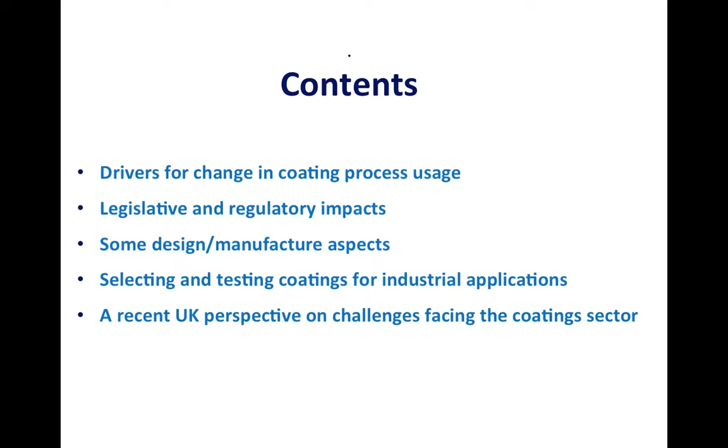Surface coating developments are being driven by technological breakthroughs and also by increased demands being placed on coatings. The increased demands may be based on legislation and regulation, such as environmental and health and safety, or by performance requirements such as needs to reduce friction and wear. So we've got technological pushes bringing along new developments. As we know, there are many new developments coming along in PVD, plasma-assisted PVD, but also by that pull from the regulation, the legislation, and by the performance pull.

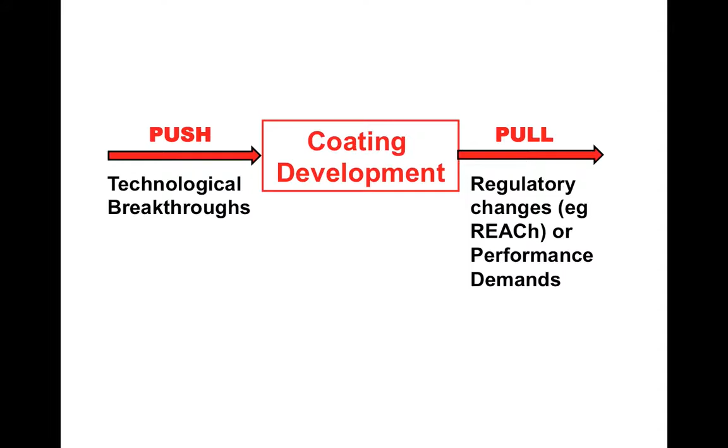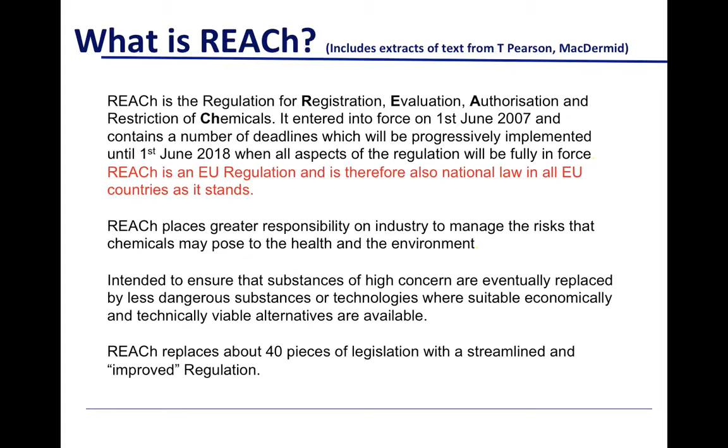One of the regulatory demands that's come along, which has been referred to a few times at this conference, is the so-called REACH legislation. What is REACH? It's an acronym, stands for Regulation for Registration, Evaluation, Authorization, and Restriction of Chemicals. It actually entered into force in the European Union in 2007, and contains a number of deadlines which will be progressively implemented until June 2018. This becomes European law in all the member states. It places a greater responsibility on industry to manage the risks that chemicals may pose to health and to the environment. It's intended to ensure that substances of high concern are eventually replaced by less dangerous substances or technologies where suitable economically and technically viable alternatives are available. So it replaces about 40 other pieces of legislation.

Originally, legislation in this area only covered new chemicals, but now this legislation covers all chemicals. There were about 100,000 chemicals which weren't considered for this legislation, but now they're all in there. In fact, there are something like 30,000 chemicals of immediate concern based on the tonnage quantities of usage, because REACH only covers certain weights and volumes of usage. It's a big deal if you're in Europe.

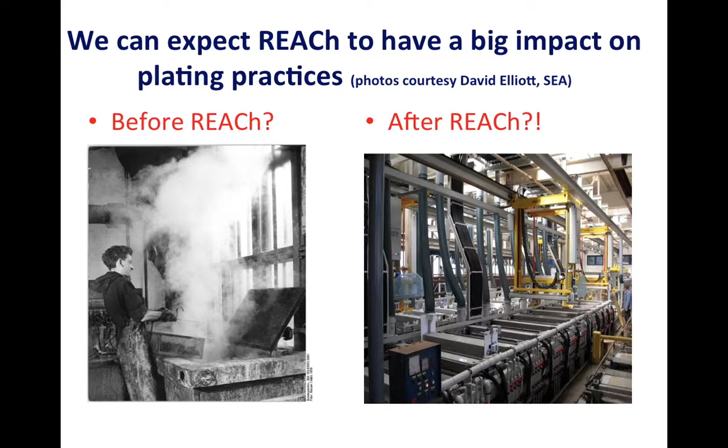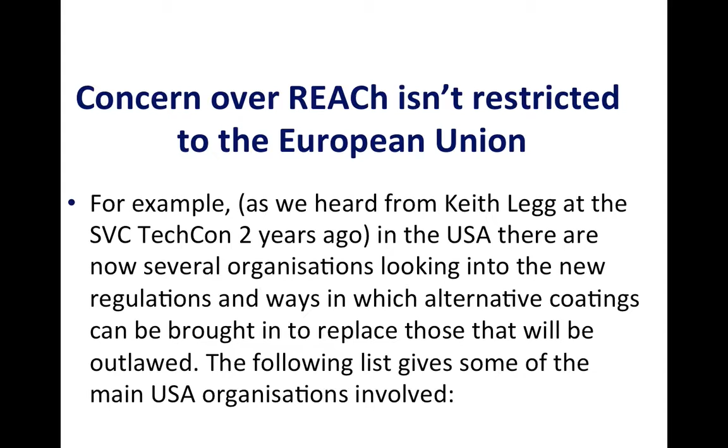If you're selling stuff into Europe, you can imagine that this legislation will start to impinge on all countries eventually. One of the main important groups in the States is ASETSDefense, and they're particularly interested in replacing these chemicals in the defense sector. They're looking for alternatives to hard chrome, cadmium plate, high VOC paints, chromates, etc. They also offer an online information source for DoD organizations and contractors.

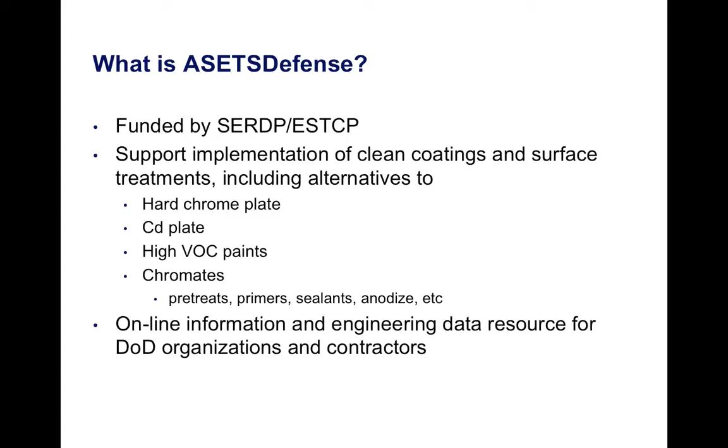We saw from Keith the way this is having an effect already on the F-35: implementing new non-chromate primers, testing Alumiplate to replace nickel cadmium on electrical connectors, new bushing materials, new aqueous electroplates, nanocrystalline cobalt phosphorus to replace hard chrome, implementing high HVOF tungsten carbide cobalt chrome as an alternative to hard chrome, and other changes coming along already.

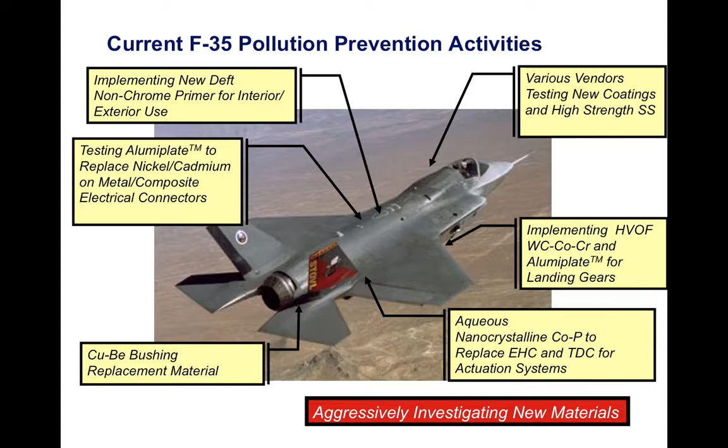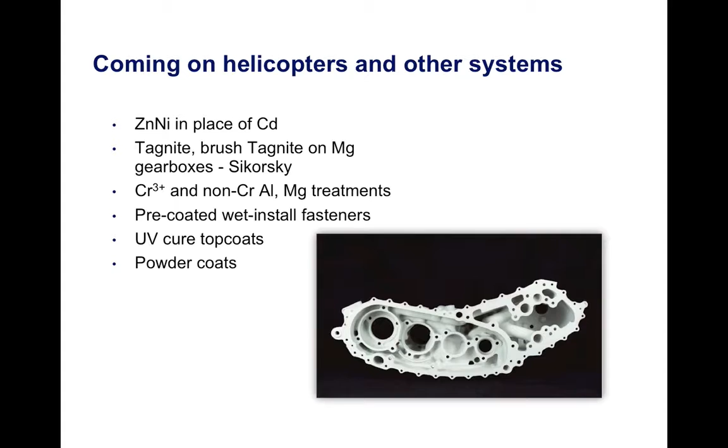On helicopter systems, people are looking at zinc nickel as a replacement for cadmium, various plasma electrolytic processes for magnesium gearboxes, and other things. You can see this is a real driver, it's affecting things already. These legislative and environmental changes are driving the use and selection of coatings and the development of new ones, carried out within constraints imposed by regulatory pressures such as environmental and health and safety concerns.

But it's also driven by performance demands - for example, energy concerns, sustainability, and efficiency demands that are coming along.

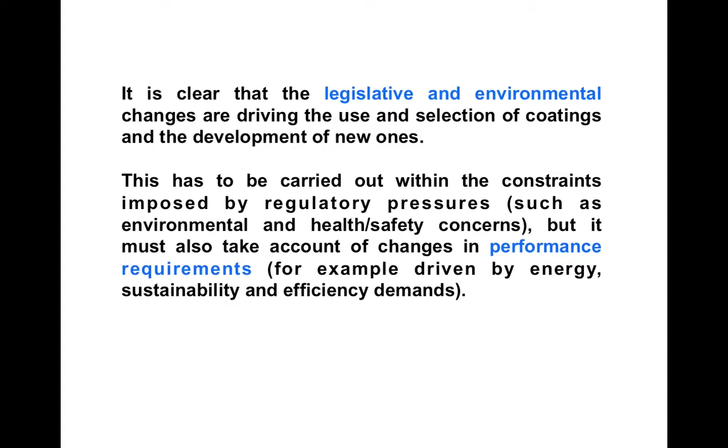The big problem, as I see it, if you're an end user of coatings and want to choose what coating to use as an alternative: there are a lot of application requirements you have, and a lot of possible solutions - a lot of coatings out there which you could maybe use. It's a major challenge how people select, test, and validate new coatings. That's the first demand for tribological coatings that I see.

We've tried to develop a structured way to make that selection - listing what's needed, then what is possible, then trying to progressively eliminate coatings for good reason. The wrong approach is to choose a coating, see if it works, and if it works, use it. That's not the best way. The best way is to assume all coatings work and then eliminate them for good reason, so you don't eliminate better solutions by default - because there's always a danger that if a coating happens to work, you assume it's the best, but it isn't necessarily. You have to go through this procedure, and it's very challenging.

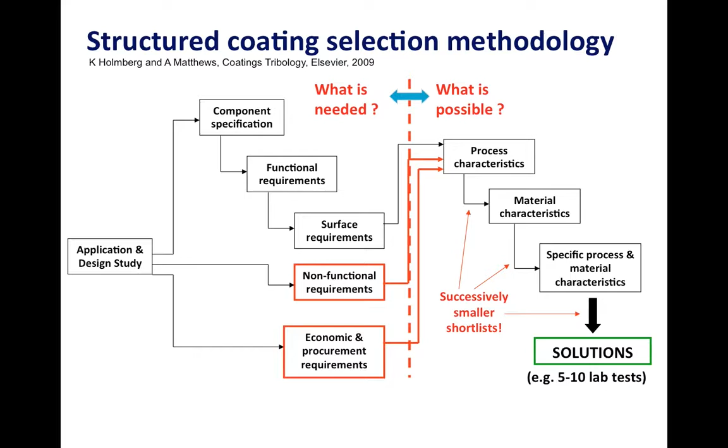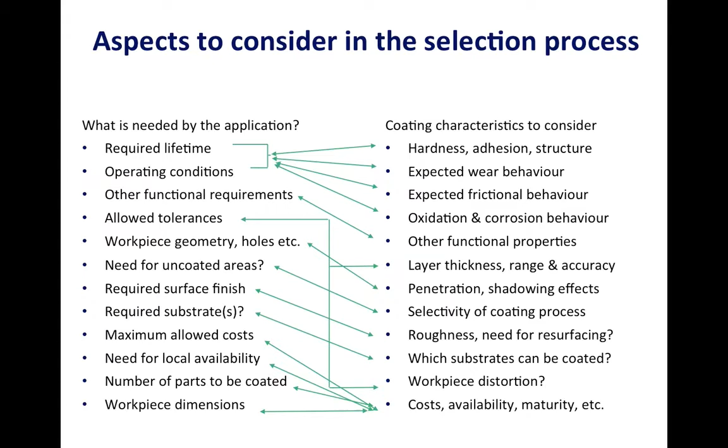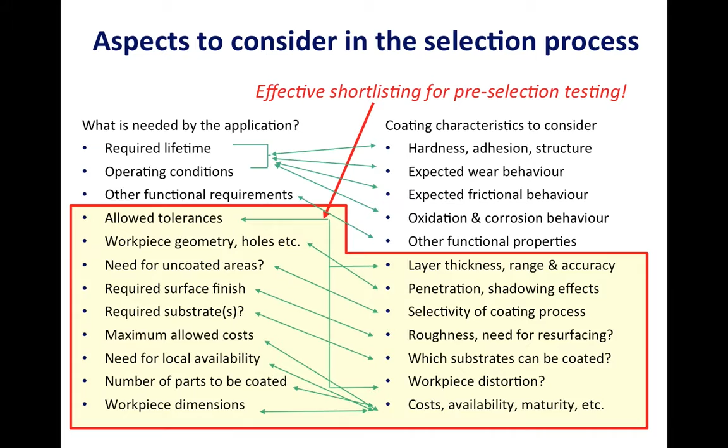If you think about the numbers of requirements for an application, and all the properties that can be influenced by a coating, you can imagine it's extremely complex to make all these interlinks and interactions to choose a coating that meets the application needs. You can get some way by eliminating ones that don't fulfill the basic process requirements - tolerances, geometries, masked areas, that kind of stuff. So you can make an initial elimination, but you've still got to find the coating that fulfills the performance needs.

The things that influence the tribological response are very much related to deformation of the system. What's the load on the system? What are the stresses on the material? What's the resultant elastic and plastic deformation? What's the fracture situation, and therefore what's the wear mode?

You've got to go through this for the different kinds of tribological types. What people used to do is just look at the wear mechanism and say, well, this application is abrasion, so we'll choose a coating to eliminate that abrasion. But I feel the thing to do is look at the contact type, because different wear mechanisms can occur in all the contact types.

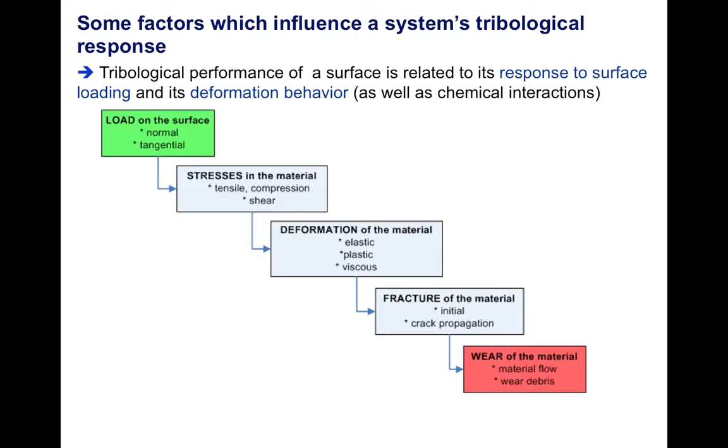So what I mean by that is there are several types of contacts. You could have sliding, you could have impact, you could have abrasion, and you could have fatigue-type mechanisms like fretting or just straight surface contact fatigue.

What I've done here is try to identify the requirements of these different contact types. The first thing to note is it isn't just hardness. Some people believe all you need is a harder and harder surface and that eliminates wear. That just ain't true by a long stretch of the imagination.

In fact, one thing we often emphasize is the ratio between the hardness and the elastic modulus. If you follow the stuff we write, we often talk about this because it defines something called the elastic strain to yield. If you have a high ratio of hardness to modulus, it means you can stretch the coating a lot before it yields. And that's more important than hardness, believe me.

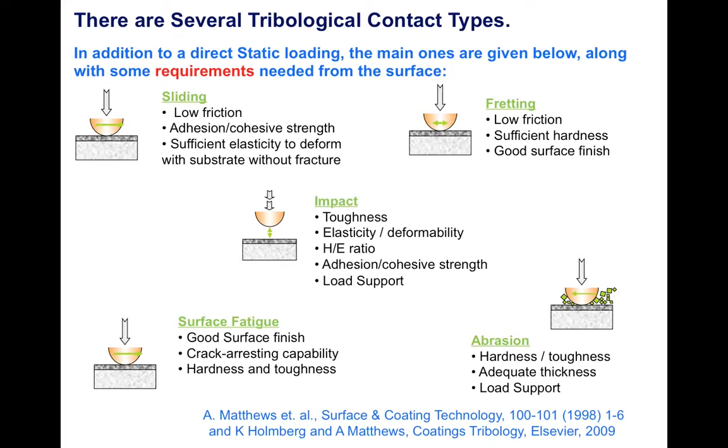Another thing we talk about is load support — the support that the underlying substrate gives to the coating. Again, people talk about load support but don't define what they mean. We all realize load support is important, but what do we really mean? Well, a lack of load support can make things fail in different ways.

If you don't have adequate load support, the coating could fracture, the coating could debond, the substrate could elastically deform—taking the component out of tolerance—or the substrate could plastically deform, taking it out of tolerance permanently. The substrate could fracture, or you could get plowing friction due to increased deformation.

So load support's important. That's one thing I believe is important as you develop new coatings: to consider the underlying substrate and the coating as a system, not just a coating.

You'd be surprised how many papers we get to my journal saying, 'I've done a hard coating on titanium to improve its wear resistance.' No, you haven't. Then they do a test at a few grams to prove the coating can survive, but there's no way it would work under a real tribological load. So you do need to have the load support.

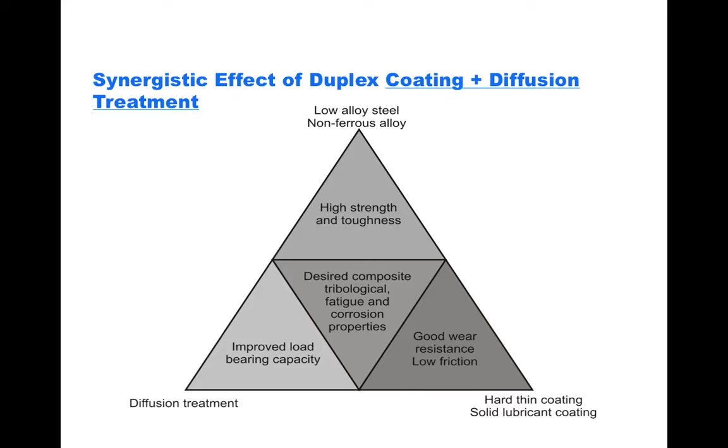One way to represent this is to have a diffusion treatment, say, to improve the load support, plus maybe a thin film to give improved tribology and wear resistance, or a solid lubricant film, together with a suitable substrate to combine them. That's what we mean by a duplex treatment. We think there's a big move towards duplex coatings and diffusion treatments.

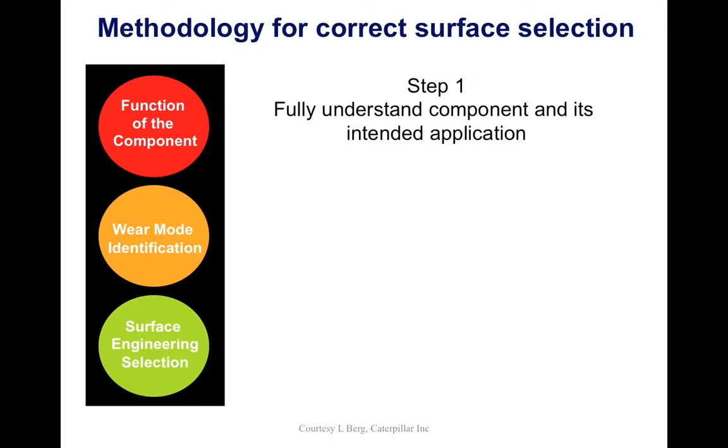I'm going to consider an example from Lucy Berg at CAT, who gave a great presentation here recently, and I thought it gave a perfect representation of what's important to an end user selecting a coating. In her talk, she said first you've got to identify the function of the component and the contact, look at the wear contact type and wear mode, and then make your selection: understand the component and its intended usage, fully understand contact types and wear modes, and select the solution. The example she gave was an inlet control valve on a common rail diesel fuel pump.

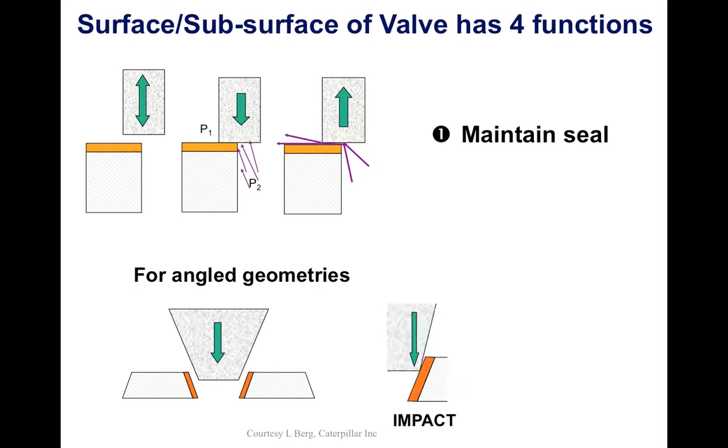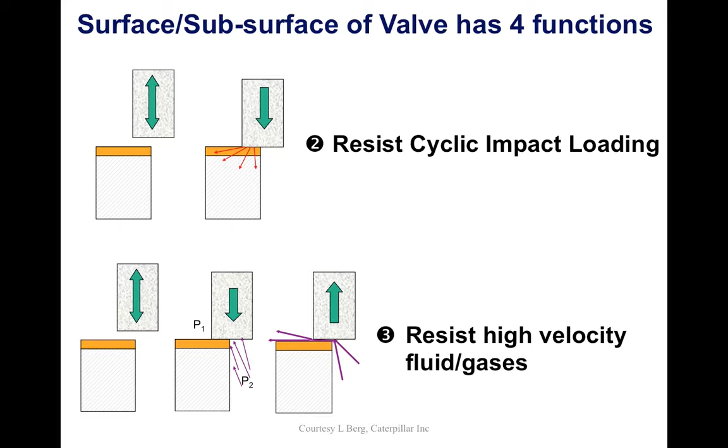And she decided this has four functions. One is to maintain a seal for angle geometries in impact and in sliding. It has to resist cyclic impact loading. It's got to resist high velocity fluids and gases. And it's got to accommodate debris.

And that means that the surface should elastically deform locally to accommodate the debris, and then the debris can be washed away, or the debris can be crushed, so you need a hard coating to crush the debris and then wash it away. So there are other requirements to consider when you make the selection.

The temperature requirement: the hot hardness has to match the operating temperature for the impact resistance. There's got to be thermal stability at the operating temperature for dimensional stability, and the tempering temperature has got to be higher than the coating deposition temperature.

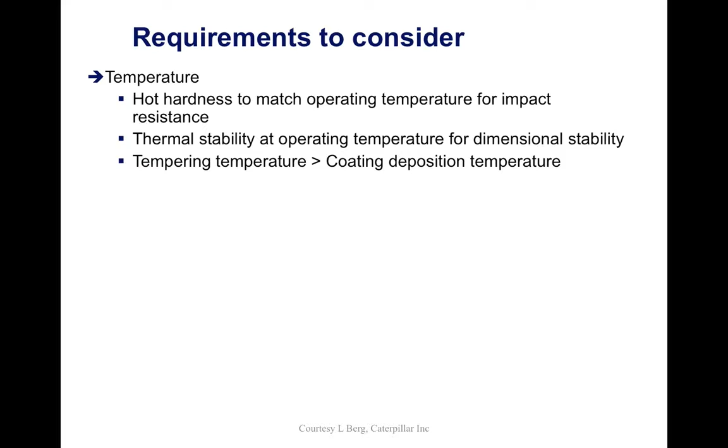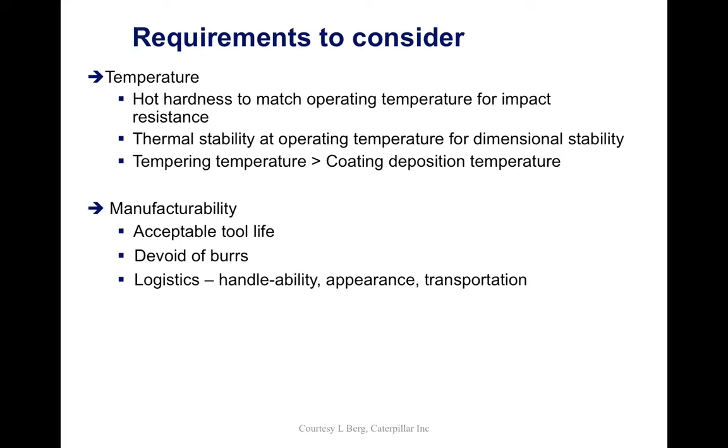You've got to be able to manufacture it. You've got to have an acceptable tool life in manufacture. You've got to produce something that's devoid of burrs if you're going to coat it. And you've got to be able to handle it. Appearance has got to be right, and you've got to be able to transport it.

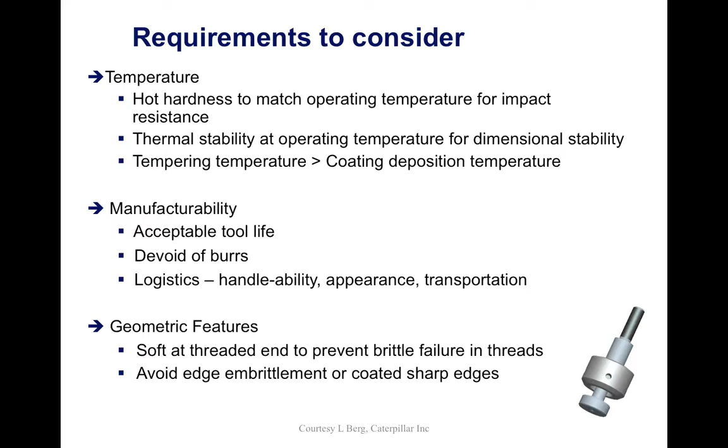And then there may be geometrical features which you've got to maintain, like maybe a threaded region that shouldn't be coated, shouldn't be made brittle, or maybe you've got to avoid edge embrittlement. So there are all those features. So that's defining the function and the requirements. So that's what they do. And they do it using those contact types that I mentioned.

So they will look at the function and the contact types, and they will categorize them according to those that I gave you. Well, that's the first step in identifying the testing that they've got to do on these coatings in order to validate them for their application.

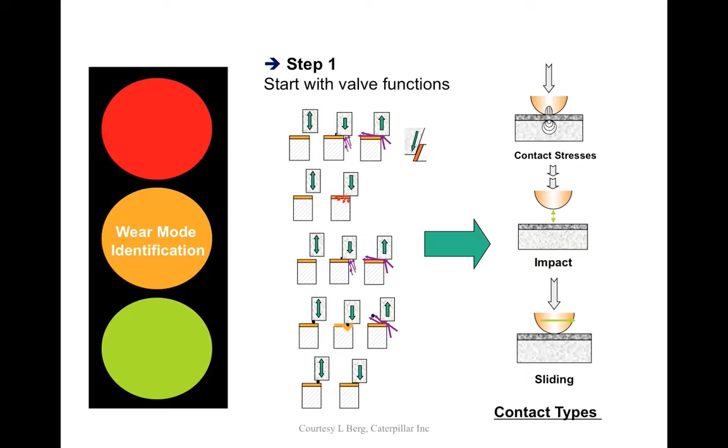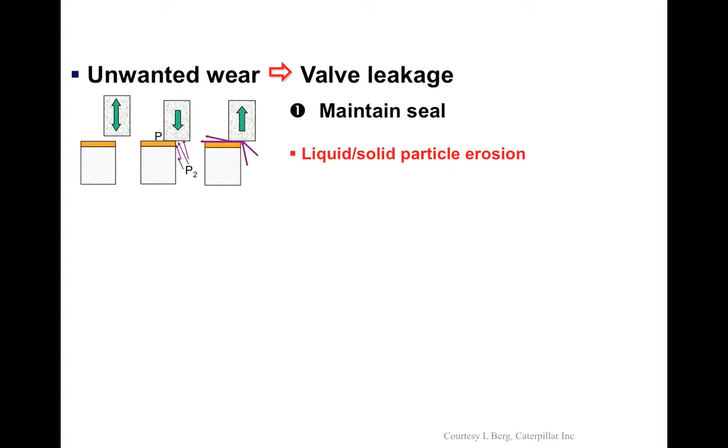So you're trying to eliminate unwanted wear, because unwanted wear leads to valve leakage. You've got to maintain the seal, you've got to resist the fluid flow, you've got to accommodate debris, and you've got to resist cyclic impact loading. That's what I said in different geometries. So you understand the wear mode, then you've got to confirm the wear mode with field trials.

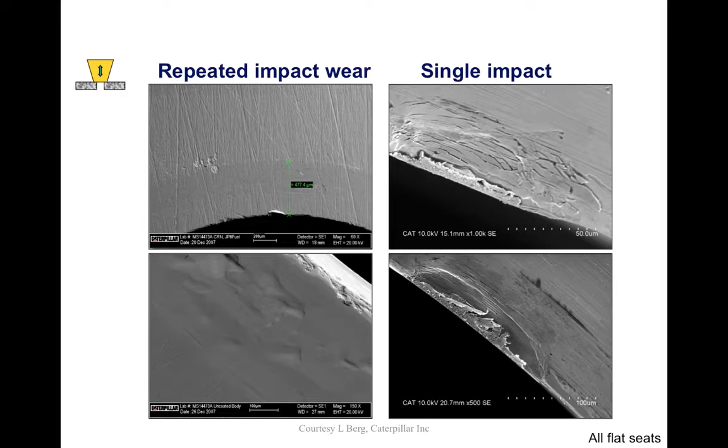So what they then do is they do the tests, and they make sure that the behavior they see from the coating is simulated in the actual... between the field trial and the in-laboratory test. So they'll do lots of microscopy just to check if the failure of the coating is as they see in the field. So an awful lot of that kind of microscopy to understand how it operates and what kind of deformation and bedding in they get.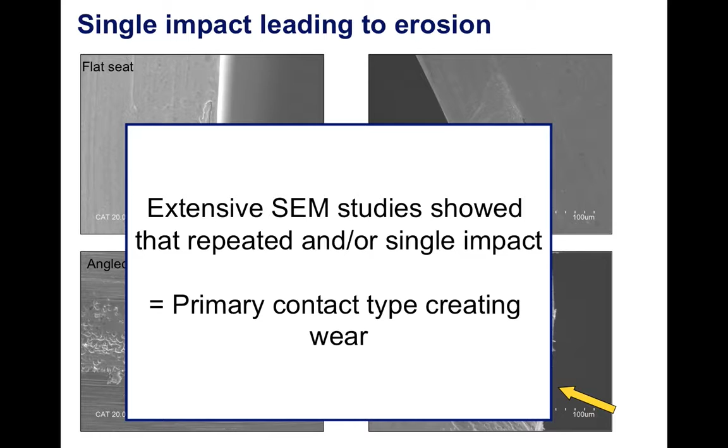And they also then confirm what are the primary contact and wear types. So in this case, they really did identify that impact wear was important in their application. So they did a lot of impact testing, and they got the solution that they were going for. So they've got their unwanted wear modes: repeated impact, single impact, erosion, adhesive wear, and cavitation. That's great. We've identified the wear mechanisms. We've seen some coatings that work.

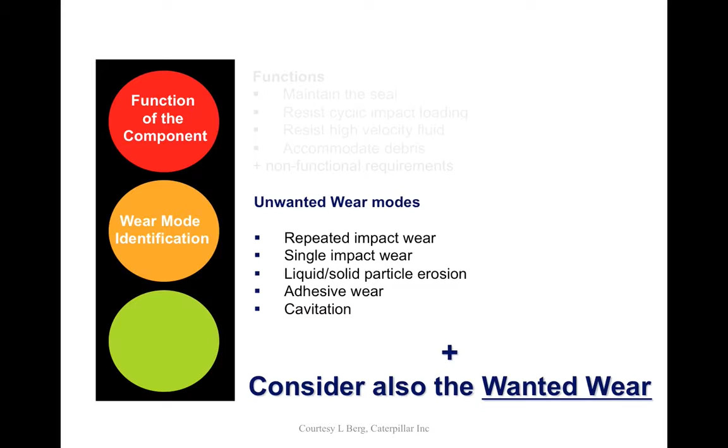However, they also want wear. You wouldn't think that, but they do, because this coating has got to bed in to create the seal. So it's extremely challenging and demanding. So the valves should be designed to wear. They're critical to the performance. New parts need to make a seal. They need break-in wear depending upon geometry.

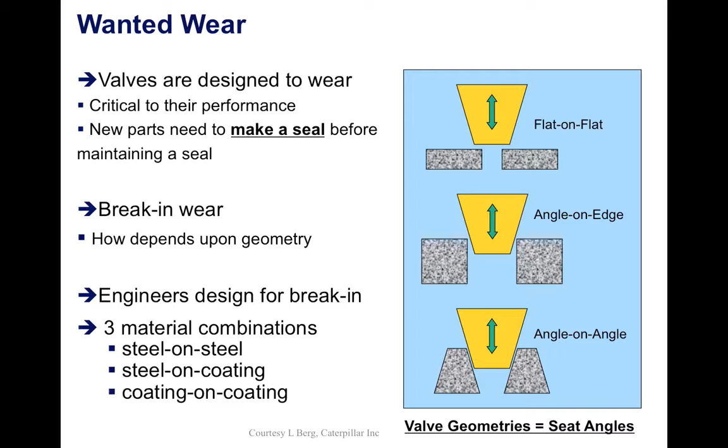And the engineers need to design for a steel on steel, a steel on coating, and a coating on coating. So you can begin to see this is extremely challenging. So they look at the deformation of the asperities, steel on steel, and coating on coating. And coating on coating didn't work. Coating on coating gives them a maintenance of a surface which actually doesn't wear and actually leads to failure of the coating because the local pressures are too high.

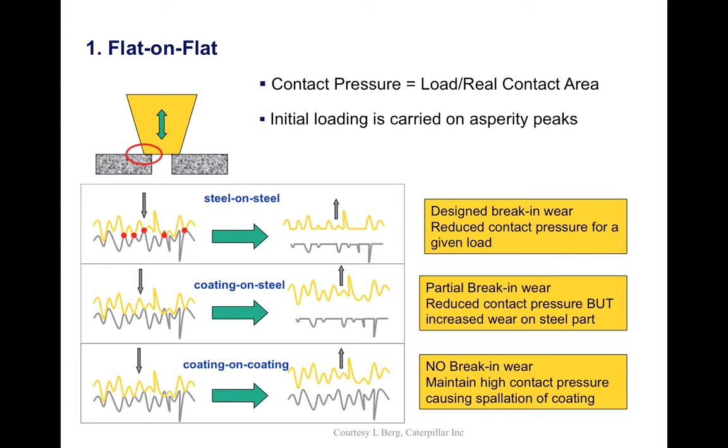So it's never simple. And what I'm trying to get across to you here is that it's not a simple case of I'm going to develop my super hard coating, I'm going to do a pin on disc, and therefore I'm going to give it to the world. No way. You've got to be aware of industry's requirements, which are complex and may not be what you think they are, and you've got to work with that industry in their testing in order to get the solution that you need, or that they need and you need.

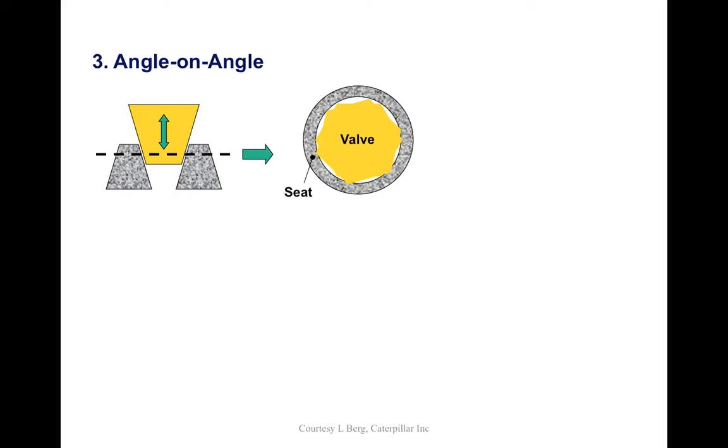So this is just going, again, through what they've got to do in understanding it and the different angles, different geometries, the fact that they've got to seal valves, they can't machine the fitting, the coating. It would cost far too much to finish machine to the accuracy that they need to get the seal. You've got to rely on the coating to do it.

So if you coat one surface, you got valve leakage. If you coat both surfaces, they got valve leakage. You see. So they had to find a solution. Now, I'm not going to give away Caterpillar's trade secrets. I'm not going to tell you what the actual solution was, and I'd get into trouble if I did.

But you can understand, hopefully, the complexity that they have, and CAT is just one company that's trying to do this. We could have done this for people who are designing all kinds of other applications, where the complexity of their demands is often much greater than we, as coaters, understand.

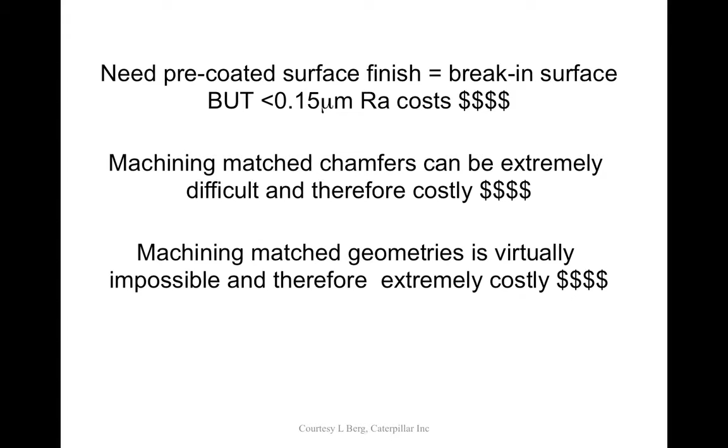They do need a pre-coated surface finish, but the finer and finer that surface finish, the higher and higher the cost. And a lot of these parts are automotive parts. They've got to be done at low cost. So it is a matter of selecting the coating to give the performance in service without incurring too high a manufacturing cost. And they need to do this before, as Lucy called it, before the design goes to iron.

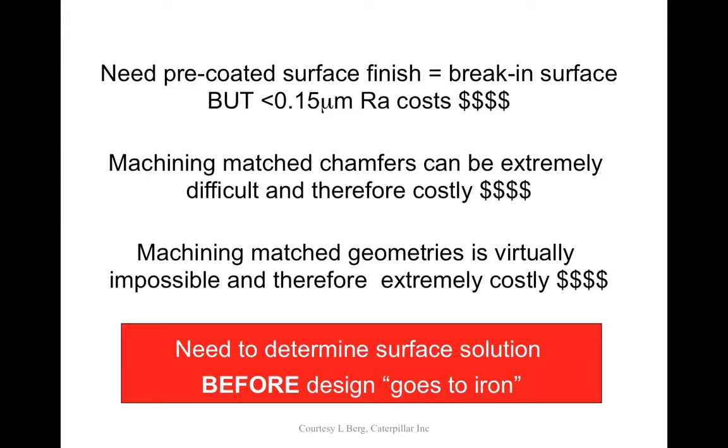It's not an expression I'd heard of, but I guess this is an Americanism. Before you actually decide to make the thing, you've got to get the solution. Okay, so I can tell you that the solution did involve the carburizing and the tempering and then a coating, but I can't tell you what the coating is.

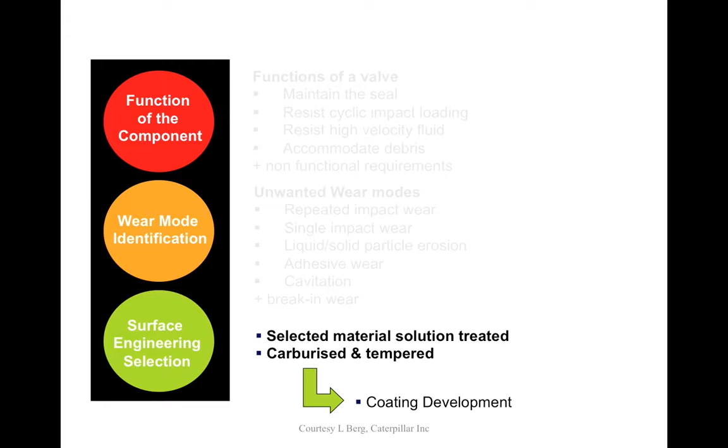And what's important here is coatings, successful coatings, successful surface engineered solutions are not afterthoughts. They're not band-aids. They've got to be designed in when you actually develop the product. They've got to be an integral part of the design process and the test procedure.

And one thing about all this is that unrepresentative accelerated tests are no good in the real world. Again, I was in the breakfast meeting this morning about medical coatings, and somebody said, can we do accelerated tests? And I think that in that field, probably more than anywhere, you can't do accelerated tests.

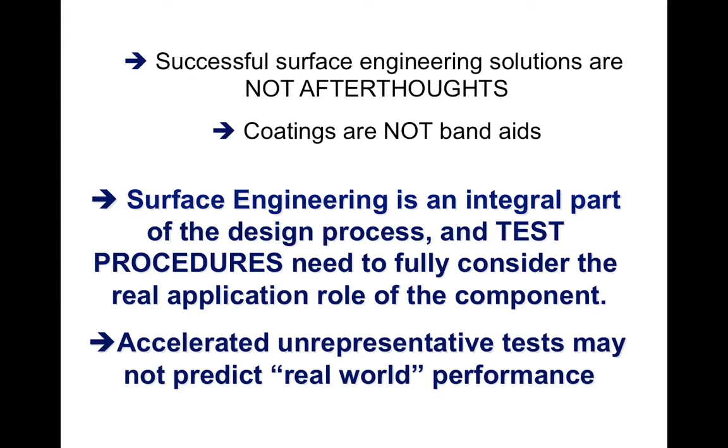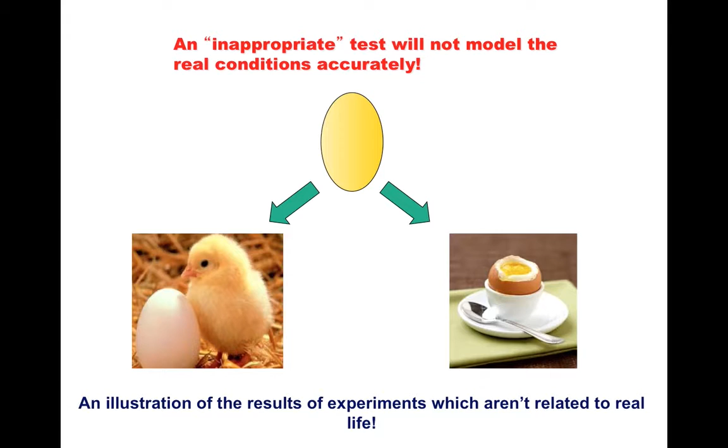Now, I have a slide which I show, which is in some way amusing, but hopefully it'll explain to you what I mean. Okay. So one guy, I was at a conference, and he said, you academics, you think you can do accelerated tests, but you don't get what you should get. So he said, if you do an accelerated test on an egg, you're going to get a boiled egg. What you should get is a chick, okay? And that really shows what you've got to do. You're not going to get the real world outcome if you try to accelerate or if you use a test which isn't related to the real world.

So we've got to address real-world challenges, and I'll give you an example of one we've worked on. I told you people think they can put a thin layer on titanium and get good wear performance. You can't. There was a guy called Tom Bell in the UK who had an ambition to be able to develop titanium for situations where steel's used now, in gears and bearings. And he didn't actually achieve it, but recently it has been achieved.

And we've managed to develop a titanium-on-titanium bearing for a huge bearing on an Airbus undercarriage, replacing a heavy steel-on-bronze bearing and removing hundreds of kilograms. And this is titanium, which is pretty incredible. I actually don't believe it, but they reckon it saves $10 million over the life of one plane, or 36,000 tons of CO2. I still don't believe that, but anyway, it's very beneficial to them to be able to replace steel-bronze bearings with titanium.

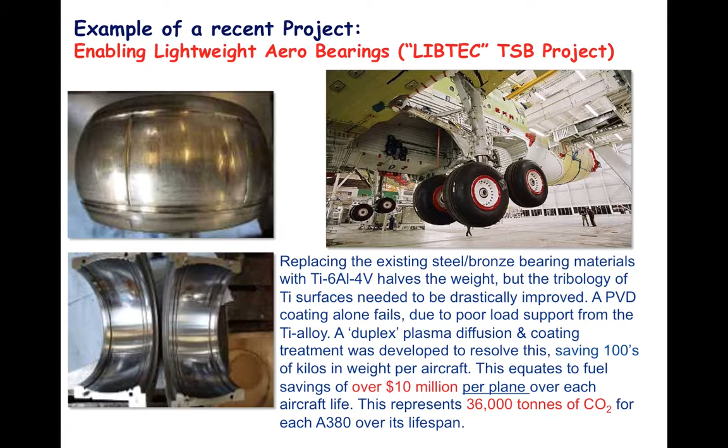And the only way to do it is that duplex approach, where you harden the titanium alloy and then you put a coating on it. So that's a real world one. Just a word about statistics. It's important to have appropriate tests.

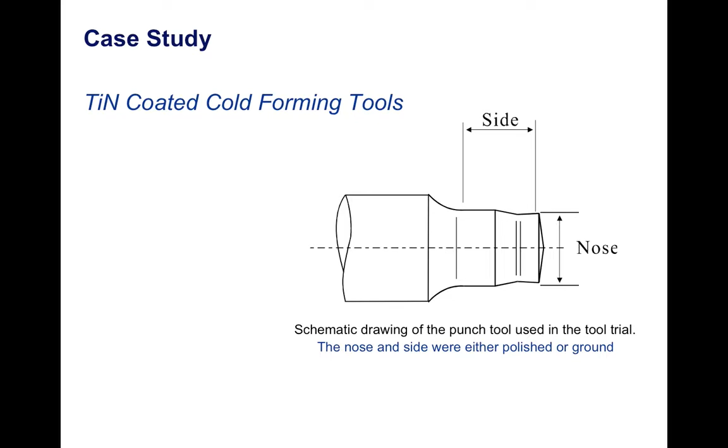This is a few years ago now, but we did some tests on a punch used in nut manufacture, and we tried to understand the performance for the producer. They had lots of data, and they got a lot of variability in the performance, and they didn't understand why. And what we eventually realized is that the coatings only worked with an appropriate pre-grind and polish prior to coating.

And they had masses of data, and they didn't understand where all the variability was coming from, but when you homed in on it, it was the fact that they did a pre-polish and various other geometrical polishes before coating.

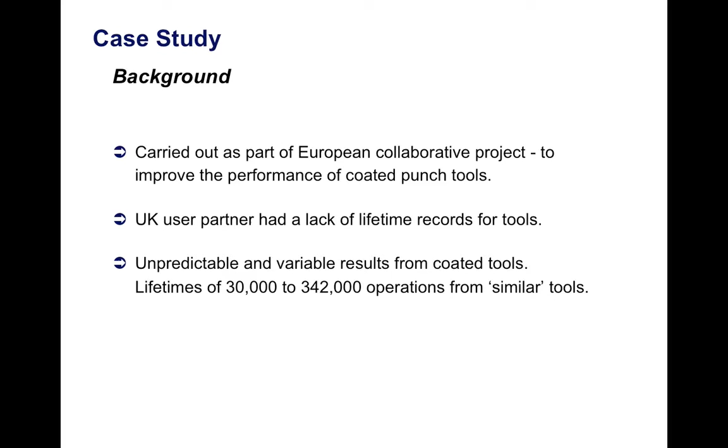And when they did that, they got... so this was part of a European collaborative project. The UK user had a lack of lifetime records, or had a lack of understanding on them, and was getting unpredictable results. And what I'm going to say really just applies for this application, but still the message that you've got to take a statistical approach to your coating performance still stands.

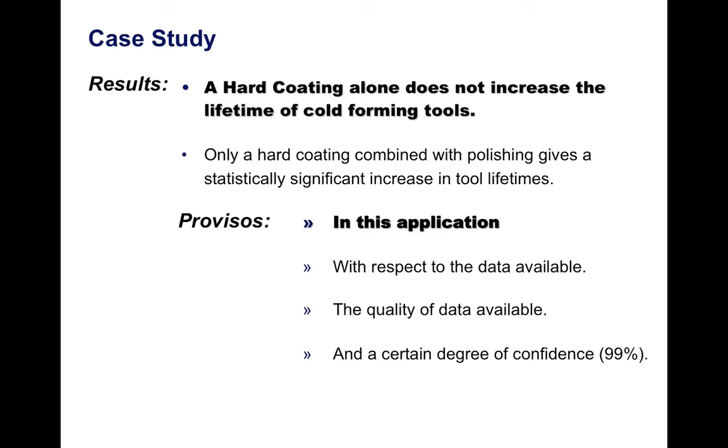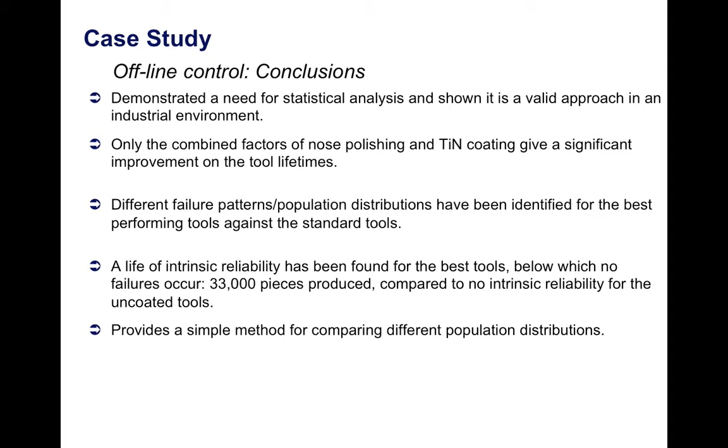So there's a lot of variability in mechanical and tribological test data, even under identical test conditions. You need to simulate real conditions, and you need to be aware of the statistics. And don't forget, sometimes you need desired wear, which people often aren't aware of.

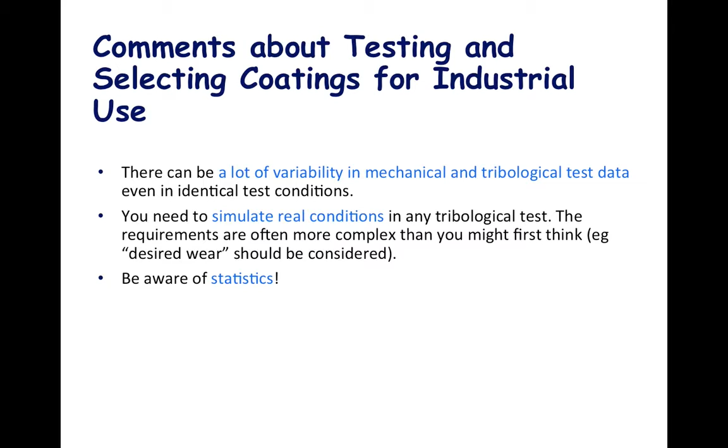Now, I did also have a lot of information from Steve Franklin at Philips Electronics, and I'm actually not going to dwell on it because it is going to be there on the SVC website, but the messages are very, very similar to the messages from Lucy Berg's application. Steve's a tribologist, and he also has the same thinking. He says you should set your tribological testing phenomena, understand things like the transfer layers, investigate the effects of test parameter variations, etc. It's just as rigorous as Lucy's.

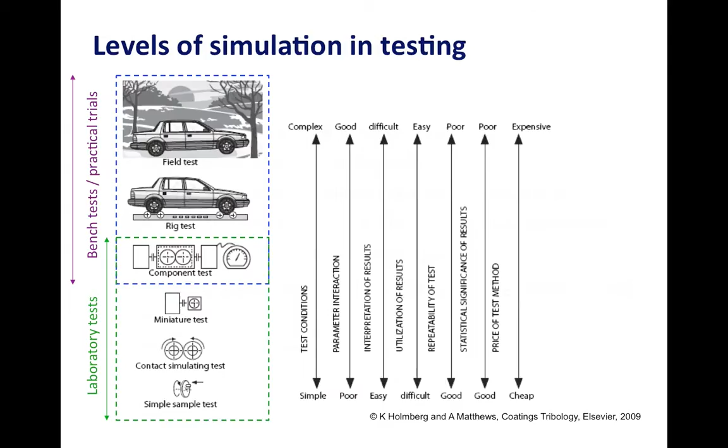And he gave me a case study where they looked at progressive levels of testing from a simple sample test going up to a field trial. And he says that the only way to get representative data is to do a full field trial, but they will still start off by a simple sample test, then maybe a simulation test, a miniature test, and a component test, etc. That's what Philips do, and he gave an example of that after making sure the goal's clear. This was one where they were testing, obviously, a coating for an iron, but they start off by doing the lab test, then a rig test, and then the real test.

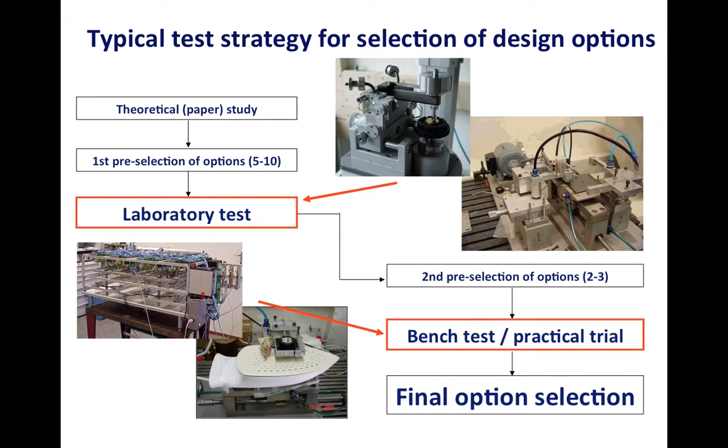So in industry, this is what they do. They're very, very rigorous, because if they get this part out into the world and then they start getting claims back for failures, it can be astronomically expensive, as we know from certain recent automotive failures. And again, this is all on the notes, you're going to see it. It's the same kind of message. State the goals clearly, unambiguously, etc. Develop the test, type of motion, the contact type, etc.

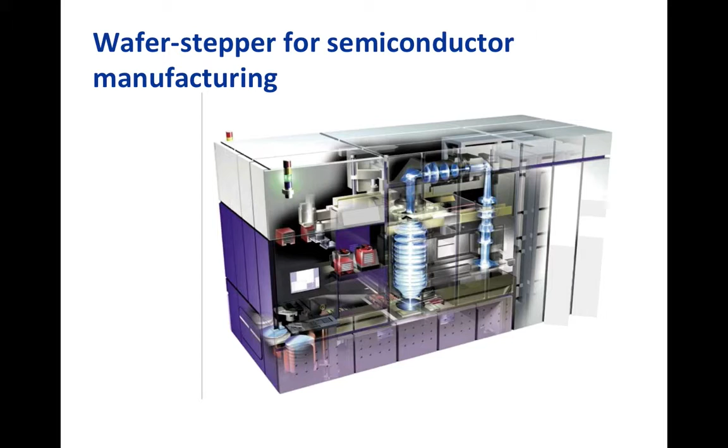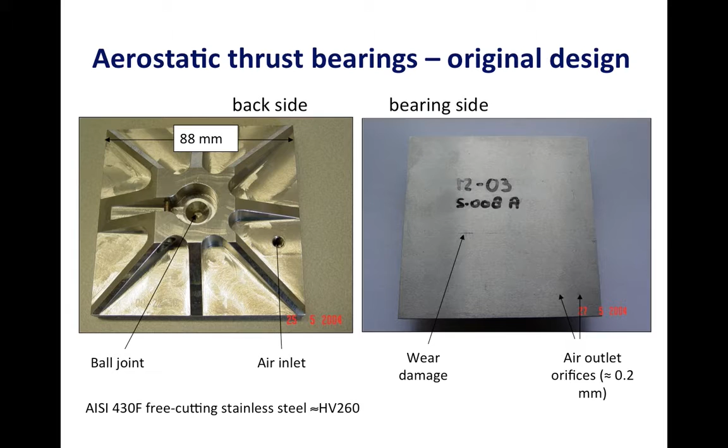So a case study he gave me was redesign of an aerostatic thrust bearing for a wafer stepper in a semiconductor manufacturing line. So within Philips, he also has to help them design for tribological applications. And in the example that he gave me, this was an aerostatic thrust bearing where they were getting wear damage associated with one of the holes where the air jet comes through to support this thing.

And they needed a new installation, a new equipment solution, and an install-based solution. So they had to find a solution to what they had by modifying it, and what they would do if they had a new design.

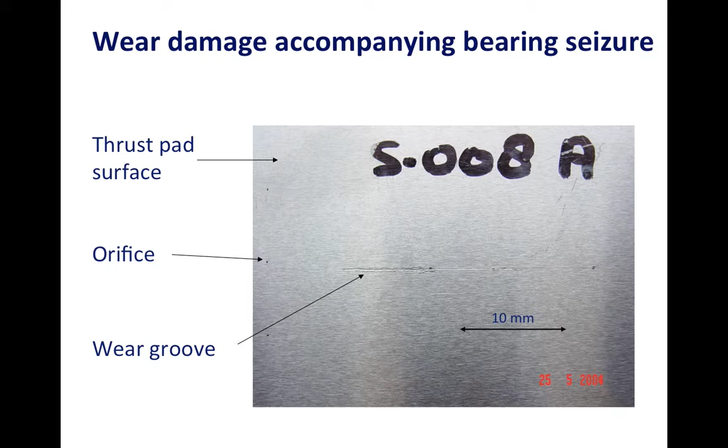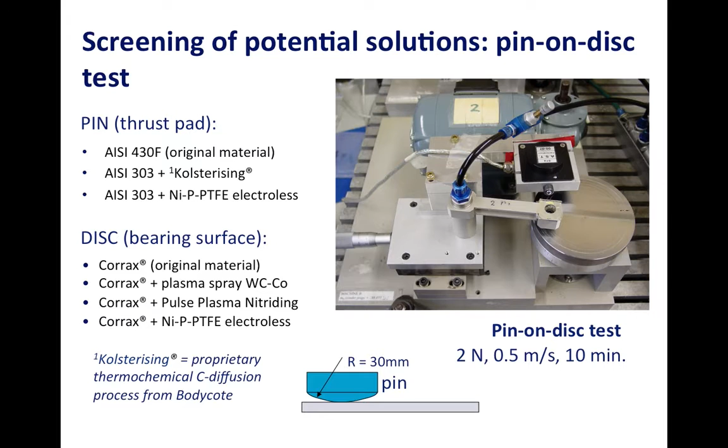And the wear was interesting. They were getting these small particles coming through near the orifice, and then they had to solve for those. They needed a non-magnetic solution, so there's information there on the test pad that they built to simulate this wear.

They got these small particles between these plates, and they were becoming magnetic because of the nature of the application. So then they had to do testing where they incorporated those little particles, and they tried different alternative solutions, both for the normal sliding and for the crashing effect of this thing.

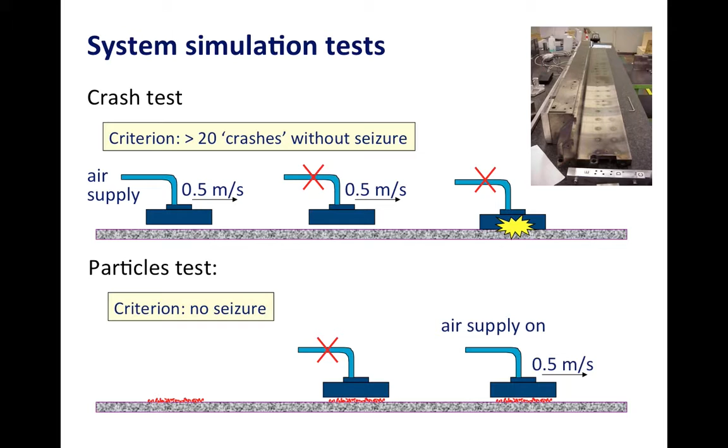So you can see, this is for the new equipment solution, and then they had the installed base solution. That's all going to be there online, and you can look at what they did. But again, the message is the same: you've got to simulate the real world, and you've got to look at all the possible solutions and eliminate them.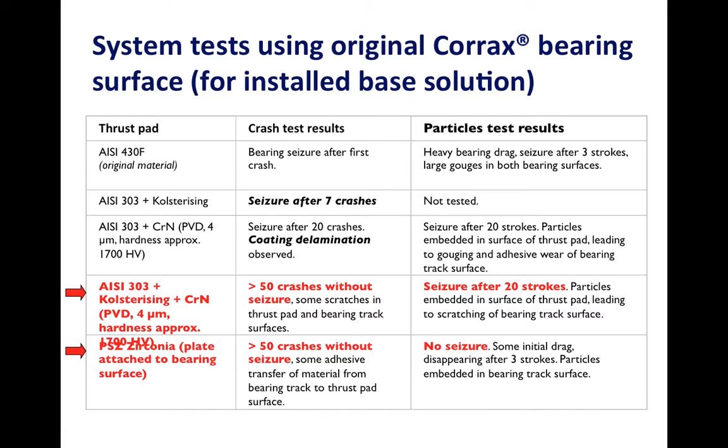So Philips, like Caterpillar, and all other successful manufacturing companies, recognize the vital importance of working with tribology, coating and treatment providers at the design stage in order to optimize their products. So this is the challenge. You get the message: you've got to work with the design people, you've got to work in their validation and testing, and work for the best solution.

So I said I'd just talk about a UK initiative, if there was time, and I think this probably is just time. Go ahead.

In the UK, recently, there was a study of the UK surface engineering and advanced coatings industry, called SEAC. It was carried out by an organization called the KTN, the Knowledge Transfer Network in the UK. Their aim is to capture value for the UK from science and creativity.

They connect people who accelerate innovation. They address societal challenges, they enable collaboration, they help to develop and build the UK's innovation capacity, they capture value for the UK from science and creativity, and they facilitate sustainable economic growth through innovation.

Have you noticed other politicians have all now started to understand innovation? The innovation ecosystem was a term that came out of the US, and it's understanding that you innovate, you create products, you create profit, it goes around, you can reinvest the profit, and you keep the whole thing going. I think it's Judith Harrison, maybe at NSF. Anyway, you can just do a Google search on the innovation ecosystem. It's a fantastic concept because it means that people, even politicians, understand what we do.

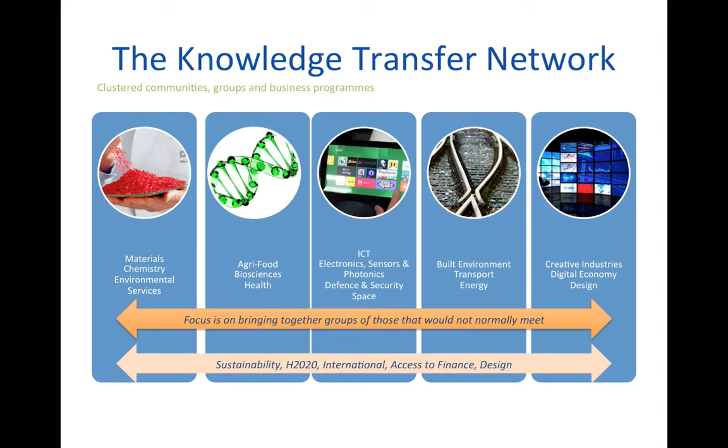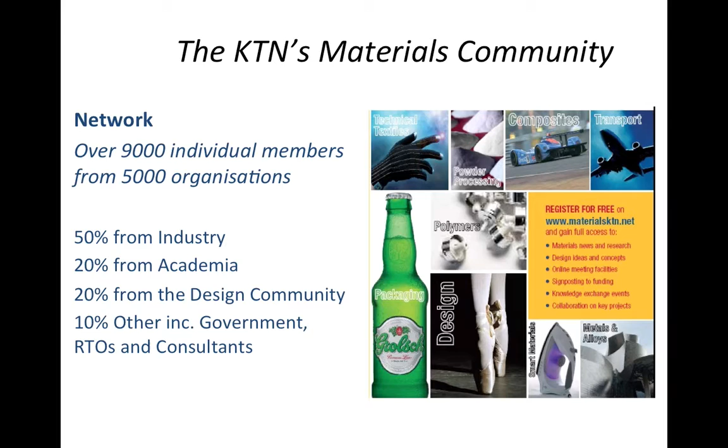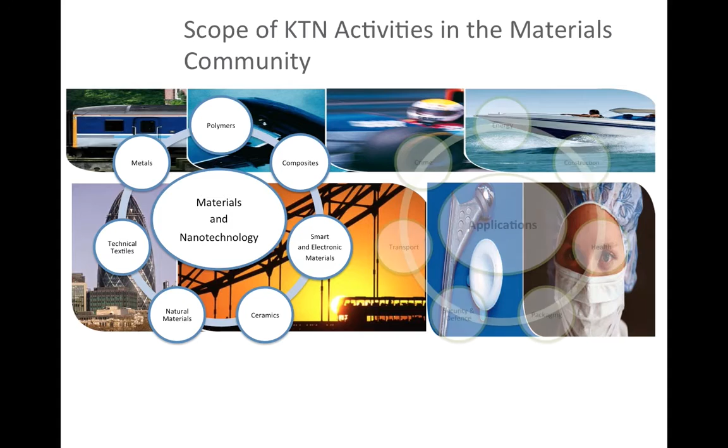These guys operate in all kinds of sectors, not only materials. In the materials one, there are about 9,000 individual members from about 5,000 organizations, a mix of industry, academia, design community, government, etc. They try to link together academia, government, and industry. In the materials sector, they look at various materials technologies and various applications technologies.

The kind of things they do is networking, innovation needs and dissemination, brokerage, and communications. A big thing they do is called special interest groups. So they identify an important area for development, for technology, and they will set up a special interest group to look at that sector.

So they did one in the coating area, surface engineering and advanced coatings, and had a working group. There was only one academic on it - won't tell you who it was, but you see. Mostly industrialists, and there is some great work looking at this sector, the coating sector.

And they held advisory group meetings, one-to-ones, consultations, etc. They looked at the market, the drivers in that market, the actions, barriers to innovation, supply chain characteristics. They had strategic workshops which they then analysed.

Surface engineering and coating is identified as a key technology area in the HVM, high-value manufacturing sector. They looked at previous reviews on this sector in terms of the value of the sector, and they confirmed that companies with a total turnover of £383 billion, so that's about $500 billion or more, used coatings extensively on their products, and that £140 billion worth of their products critically depended on coatings.

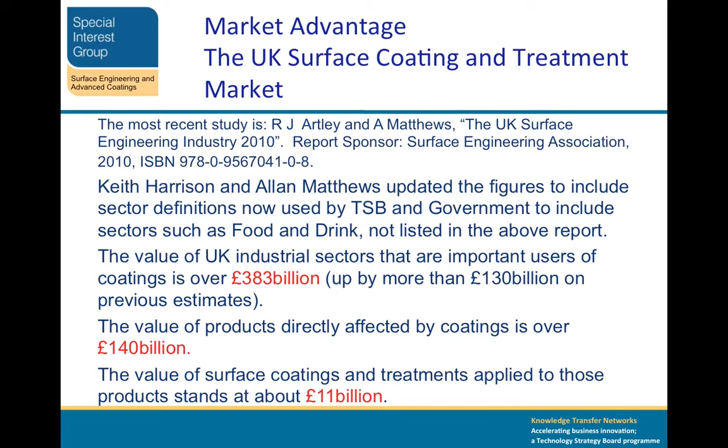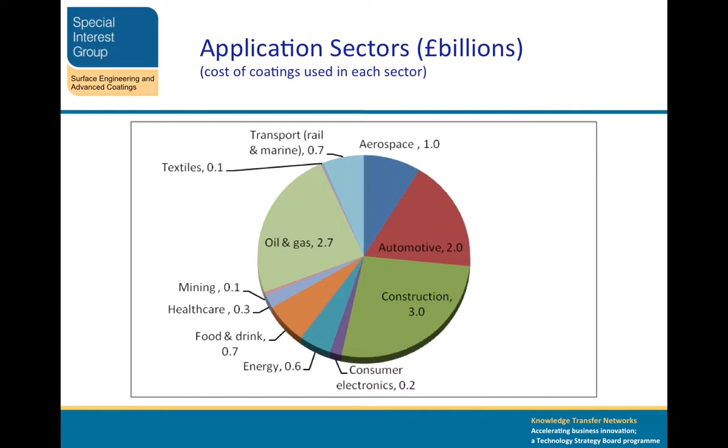And they looked at the use in different sectors, and these numbers will just be scaled up, and the sectors will be the same for every country, but I think the findings are still valid, even though it was a UK study. It looked at it through the complete value chain, from R&D through to the product, production, and even through to disposal.

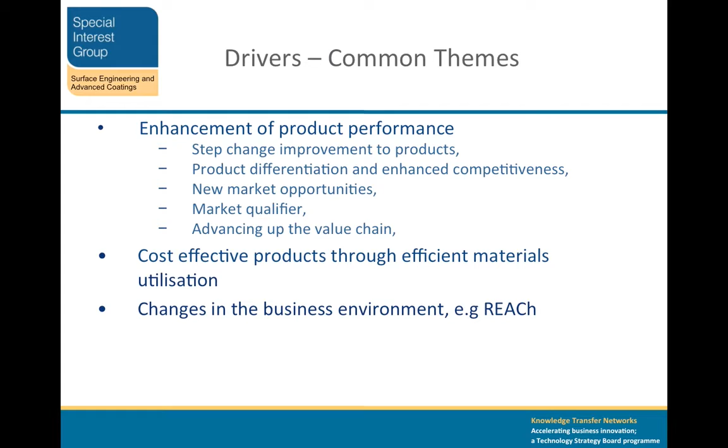And they realized the drivers were enhanced product performance, cost-effective products through more efficient materials utilization, changes in business environments such as REACH affecting things, and the demand that's there now for sustainability. I think sustainability is one of the biggest drivers for us now, for all of us, and the fact that coatings can help so much in sustainability.

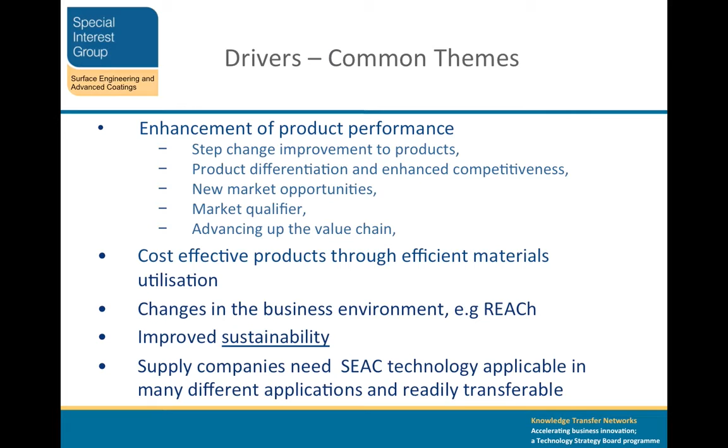And supply companies need SEAC technologies applicable in different applications which are readily transferable between sectors. You're well aware of some of the types of uses for coatings.

So they wanted to see how they could maximize the value of innovation, how could they affect the supply chain, how could it become part of the high-value manufacturing sector. How do we change the game in manufacturing in the SEAC supply chain and maintain competitiveness through the product life cycle?

Now, we were fortunate in having a guy from Rolls-Royce, Dave Rickerby, chairing this group. He said that the problem they had at Rolls-Royce was uncertainty about the long-term performance of new coatings, and high financial risk in introducing new technology. If it fails, it's a disaster.

Complex and costly qualification processes for certain markets, often a lack of industry standards. And they need a standard. Rolls-Royce can't put a coating on an engine unless it has a standard, unless there's a standard they can put on a drawing, they can't use it. So it's important that there are these standards.

And there was a perception that the supply chain was inward-looking and conservative rather than proactive to industry needs. Does that describe the coating sector? It might do - somebody's nodding.

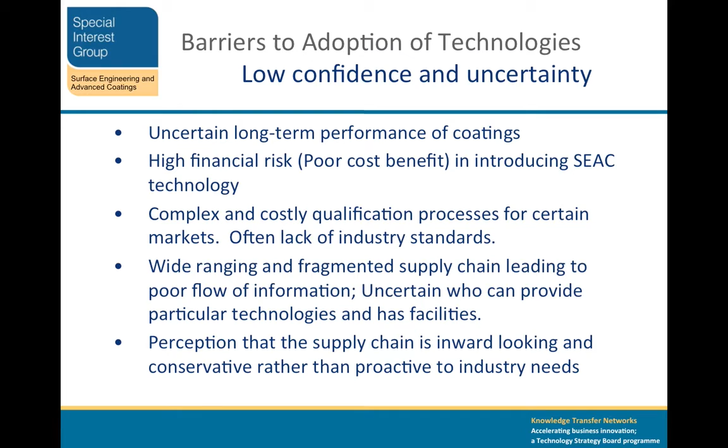So Dave showed us some fairly complicated Rolls-Royce charts and diagrams, which normally are just for internal use, but he allowed them to be used in this study - they're in this report. His view was that at the moment, everybody's looking at the application and solving the solution as it arises on the product.

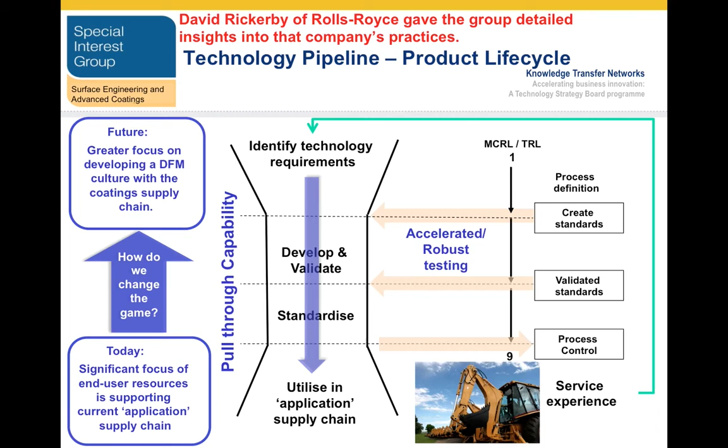What it should do is focus in on developing a design-for-manufacture capability within the coating supply chain. That way everybody benefits, the end user and the coating producer. Also he believes standards should be introduced as it's coming through that funnel, whatever it is.

So Rolls-Royce sees a significant need to identify, develop, validate, and standardize coating technologies with the use of robust testing, to validate the coating system as fit for function at the design and product development stage. They achieve this by integrating the research base and the supplier base and working together, and they do that extremely effectively around the world, not only in the UK.

So again, another one of Dave's complicated diagrams. But basically, it's all about creating project teams at the early stage, integrating the science base, the material supply chain community, and the manufacturing sector, bringing things through that developmental funnel, or whatever it is, and introducing standards.

And it gets even more complicated. As I said, these will be there for you to look at and take in. But you can see the complexity that a company like Rolls-Royce goes to in order to ensure that the coatings that are coming through are properly tested and validated.

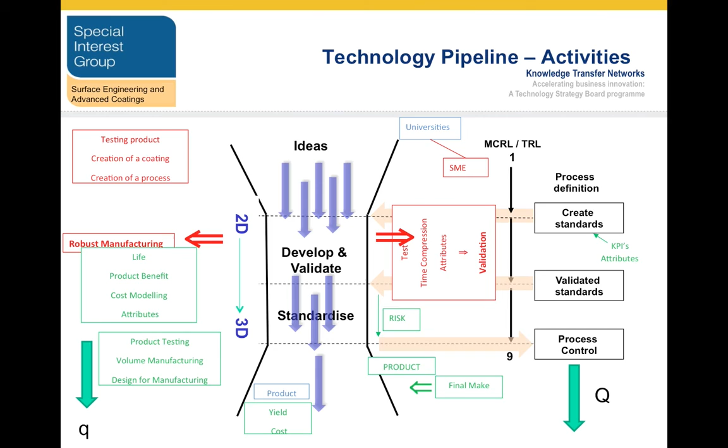So the conclusion is that the tribological coating researchers and coating companies should get together with the product design and manufacture companies at the beginning of the product development cycle to ensure that their coatings really meet the needs of the end users. Developing coatings and processes in isolation may be interesting scientifically, but it's unlikely to provide the optimum properties in the coating, and is therefore less likely to create a market for that coating.

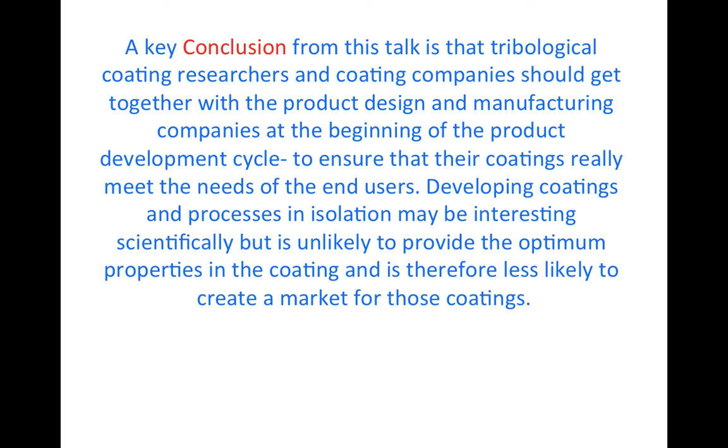So it's in everybody's interest, it's in our interest, to work with the producers to make sure they get the coatings that they need. And that report, because this is going to go online, the link to that report is going to be available. These are just some bits which I didn't get through, so the link to that report is going to be there for you to get. Thanks.